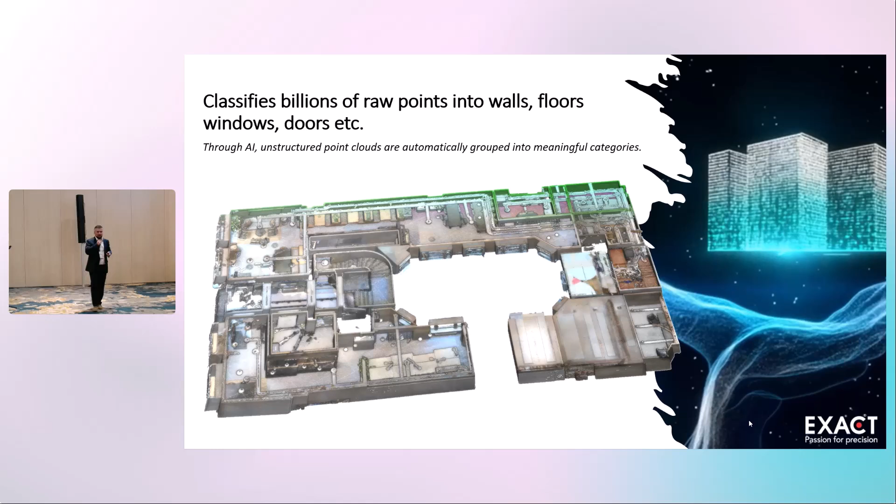So what you're seeing is basically an unstructured point cloud, which we need to structure. We have developed AI that provides and attaches a color to an element. In this case we have green for walls, and different colors for different elements.

Once you have structured that, the next step is what can you do with it? Now we can add IFC elements to it, because we are using IFC to train the algorithm. By adding these elements and giving them more information, you can select what you want to see and unselect what you don't want to see.

Suddenly, from unstructured data you have structured data, and this is something you can already work with. For example, you can take the LOD 100 of the point cloud and select the elements required for that level, very bare in construction, and send it to a modeler who will have a much lighter point cloud.

And normally now, modelers working with point clouds are also using images - with images for more context, and the point cloud they can use solely to focus on modeling what is necessarily specified in the project. So already here we have good use just by introducing these small steps.

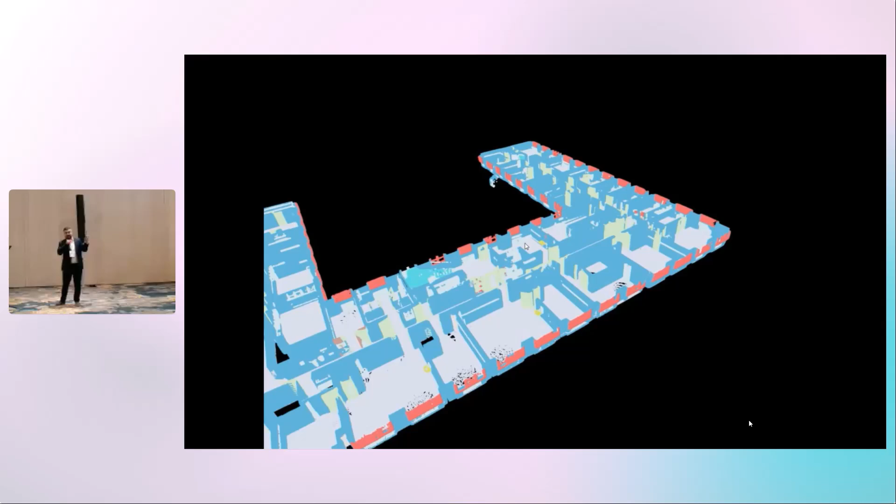Me saying this can be a little bit confusing. I have a movie showing this in action, and this is from a test environment for us. So you have a picture here, and you take this in the proper way.

You press on the picture, it automatically projects, and you can increase, decrease, make sure that you are as close as possible to 100%. You can click further. Everybody that has worked with SAM methods, CLIP, or these methods understands how this technology is basically working. We are just trying to use this technology to increase the accuracy.

By introducing this step, we are very close. We are above 99%, but we are not at 100. The question is: is it possible to go to 100? We are very close.

But the question is, is that the optimal way working with the science project? Well, no. And that now is the punchline for step 3. Step 3 is basically that everything you do in step 2 is teaching the algorithm to be better. So more clicks in step 2, less clicks later.

So we are thinking that after we are done with this project, when we have gone through all the data, 1.4 million, we will remove step 2 and 3, and we will open for only point cloud classification without necessarily introducing the pictures, because E57, with embedded pictures, are much larger files.

When working with this, you need to think not just about all this fancy thing, you need to think about how to scale the servers, how to work with CPU, GPU, and these things. These things are also a completely new subject. I think you could sit for half an hour just discussing these things when working with AI.

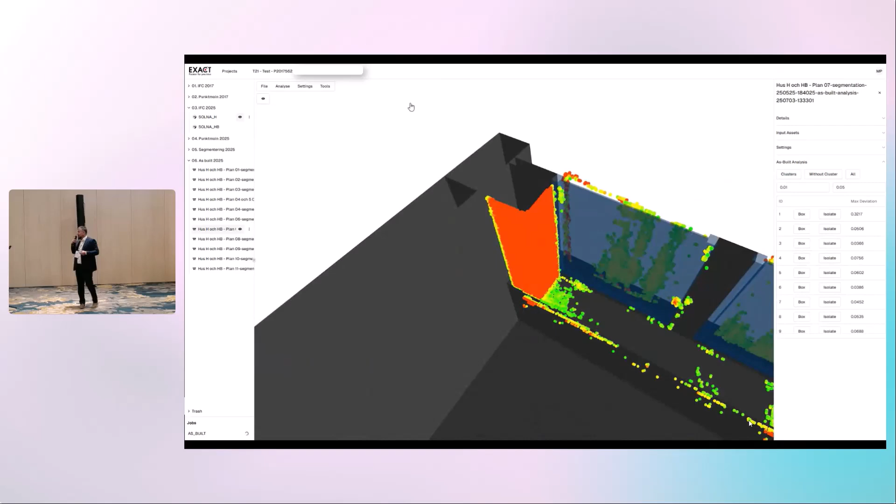So this is something that works. It is in our pipeline. We work with this. Basically, you segment a building of 10,000 square meters within 5 minutes, and you will see that it shows you deviations. So instead of putting down 10 to 15 percent of your time, or 10-15% for quality assurance, you will just have an algorithm running it through in 5 minutes, and then you will manually check everything that it shows. So it increases the possibility for us to be even more effective when producing 3D models from point clouds.

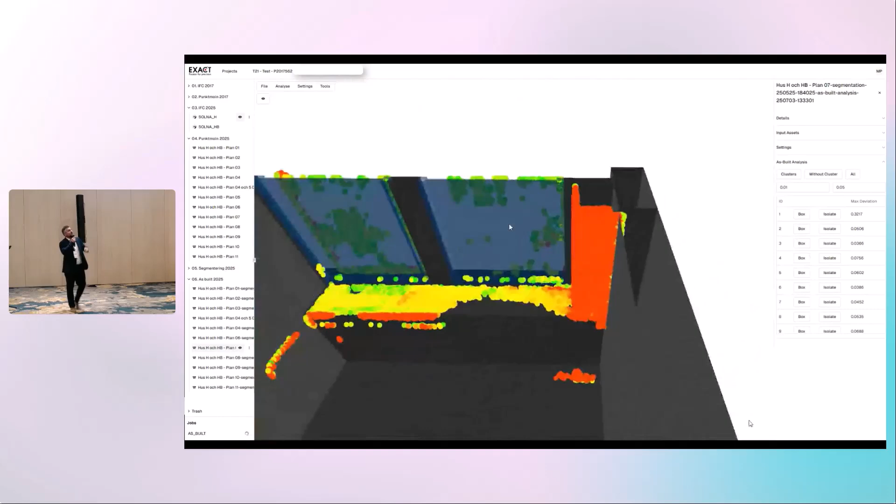Here is a missing door. Same situation on the other side, the corner has been missed completely by the modeler. And the question is, what is this? The algorithm recognized this as some object that should have attention, but the people who modeled it, they modeled it correctly. It's not part of it.

So the question is, when we have implemented BCF here, the question is this BCF basically is creating so many things, so it's a challenge for us to tackle. So we need to go back and see how we can structure BCF data, automatic BCF data, to be able to be more effective.

Well, to move further with classification, we take the second step to 3D modeling. We are classifying into categories. The first step, we have divided this step with 3D modeling into 4 steps. Second step, we automatically generate the floor plans. And then we are adding more information to the floor plans: rules, regulations, Norwegian standard, Swedish standard, and so on, BSDD. And then we are just building up a 3D model based on IFC.

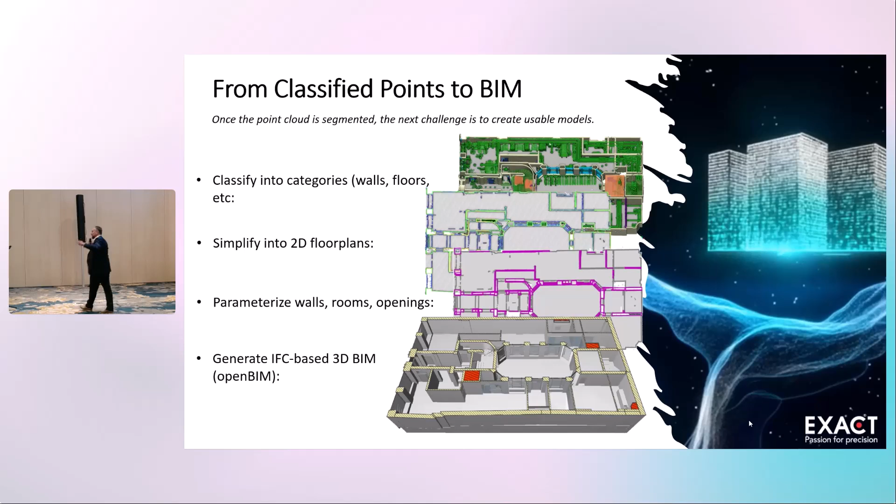Our focus is IFC, but the project directives are native files, and that too is a separate subject. So let's move on, to be able to generate RVT or PLN files another time. But that's a project objective in this case. So where are we? We have looked into deep learning. We are using deep learning all over the place in this project, but in this case, it's not time for it. We have looked into mesh modeling.

It's not time for that either in this project. But what we are doing, our method, these 4 steps, is very transparent. It's architecturally logical, and basically we can add BSDD, we can add IDS, we can add things that are making it more adaptable.

We can add a Norwegian standard, we can add Swedish standard, we can add other standards to it. And currently we are at step 3. We have managed to produce floor plans, and we have managed to add some rules. At the same time, we are working with LLMs and VLMs, natural language and material requirements or material information.

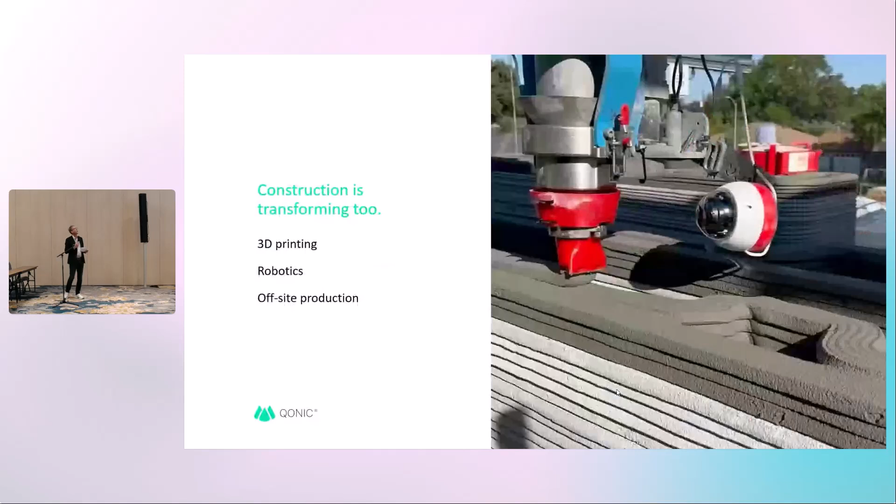And then this is a perfect slide for this part of the presentation—it's not only in the design part, it's also in the construction part. So when the design is finished, of course it has to be built as well. And then you see that also in the construction industry, there is a lot of new technology emerging.

One of the well-known ones is 3D printing, allowing that complex geometry to turn into reality. You have robotics for building, on-site and off-site. Next slide, please.

But there is a but. We think that this nice opportunity is a bit hampered with the modeling tools or the software we have today.

So today, as you start on a design, you have a choice between two paths. You can either work in a free form modeling tool, or you can directly start in a more technical design tool. If you start with a free modeling tool, you have the well-known examples like Rhino or SketchUp.

Okay, so let's show some things here in Qonic. I want to show some of these points that Dieter mentioned during his presentation. First point being about taking geometry from basically anywhere and continuing it within the further process in BIM. In this case, we have some geometry that came in from different sources: some Revit models, some IFC files, maybe some geometry modeled in a tool like Blender with really complex geometry, or maybe some industry-specific geometry, like an elevator modeled entirely in 3D. The point we were trying to make is that we don't want to limit the functionality within Qonic based on where it came from.

So for instance, we have this little pavilion, which was actually made in Rhino. There's some 3D geometry with a nice looking roof here, but it's not actually BIM geometry. It's not data rich. If I select this door here, you'll see it doesn't actually have an IFC classification. This is a building element proxy because, again, it came in via Rhino. It's just dumb geometry. This also means there's no relation between this door and the wall it sits in, so if I move this door, you'll see that the opening doesn't actually move with it.

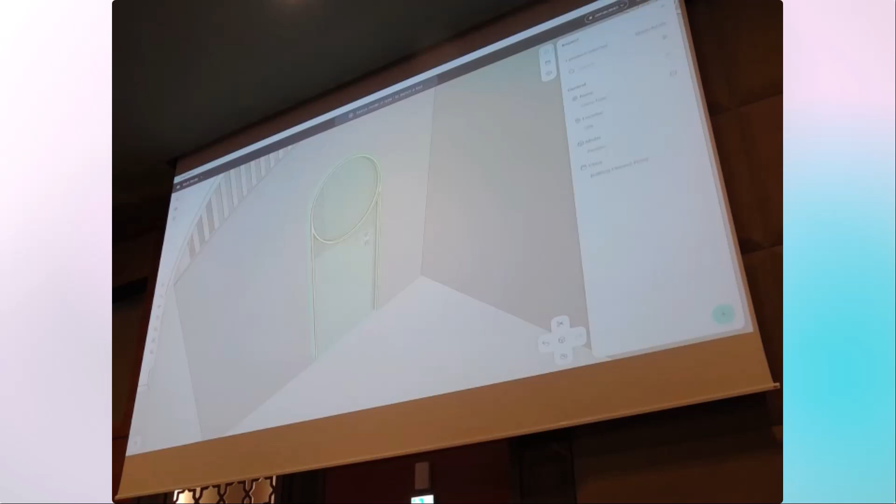Because, again, this is what we call dumb geometry, Qonic allows you to enrich these kinds of models coming from SketchUp or Rhino with proper openBIM data. The entire data structure of Qonic is based on IFC, which means we have things like IFC classes and IFC property sets built into the product natively.

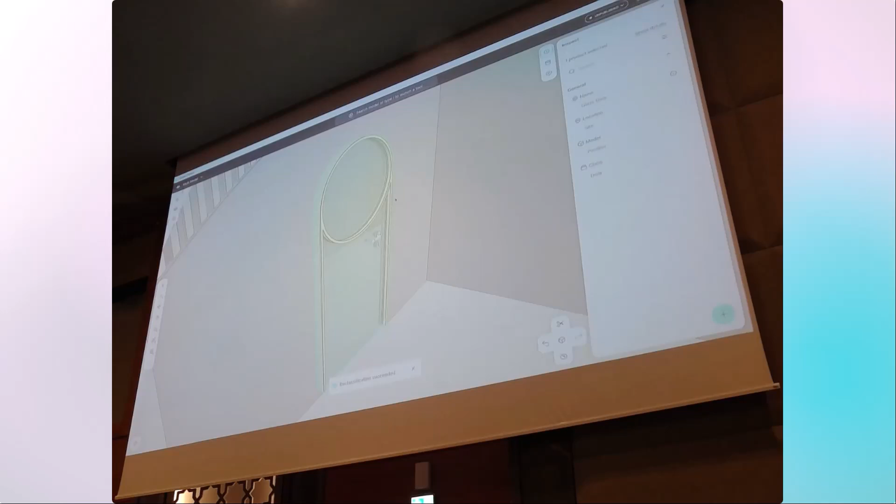So we can either classify this door manually by choosing from a list of supported IFC classes, or we can let ourselves be assisted by our own AI assistant. As Dieter mentioned, there's an AI assistant called Qonic Intelligence, which, based on the geometry and context, will make its best guess as to what something might be. In this case, the top guess is a door, which I will accept. Now, once we've classified this as a door, it'll behave like a door. So if I move it, you'll see it'll actually also update the door opening, behaving more intelligently.

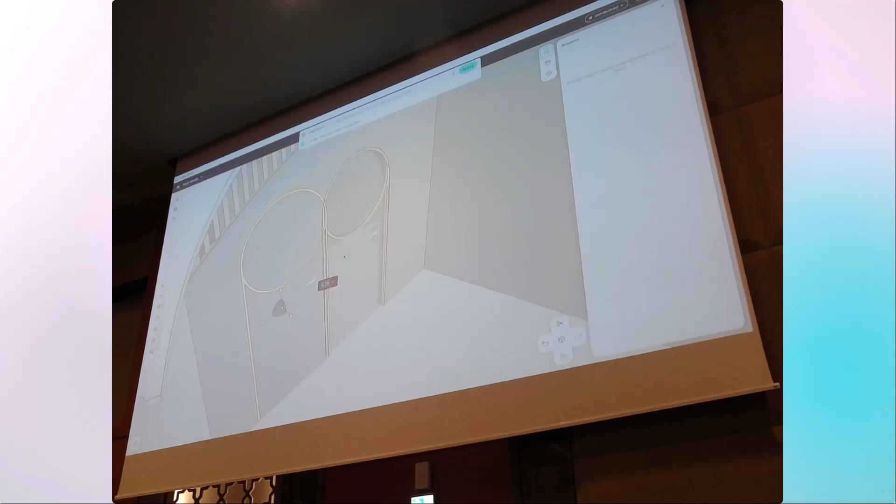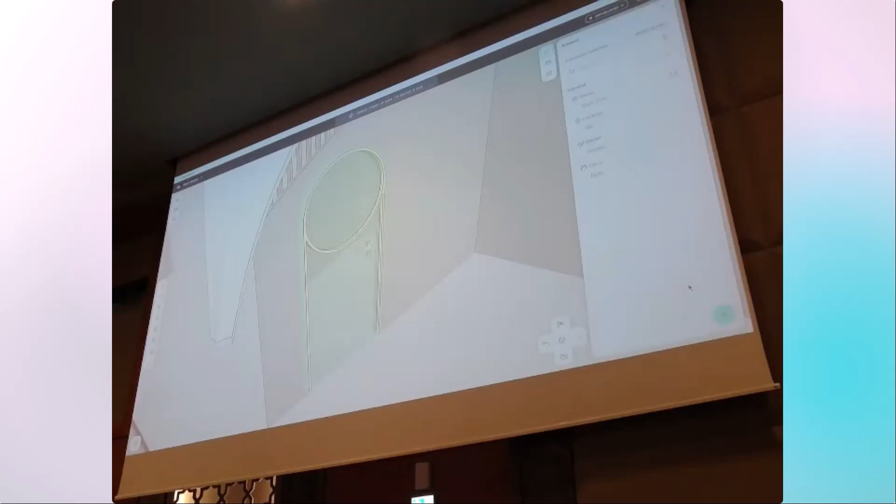We can, of course, further enrich this with other openBIM data, let's say property sets and properties from the IFC schema for a door. So under door common, I can add a fire rating and so on, status. So I can enrich existing models coming from geometry modeling tools and take them further downstream in the BIM process.

So not only can the data be edited, but of course the geometry itself can also be modified. You can take this geometry coming from Rhino or any other tool, also IFC geometry, and actually start to modify it, of course if you have the necessary access rights. So in this case, I'll create an opening in this roof here.

This is actually just a small demonstration to show that we can handle quite complex geometry. This is NURBS geometry coming from Rhino, and it can still be further edited within Qonic.

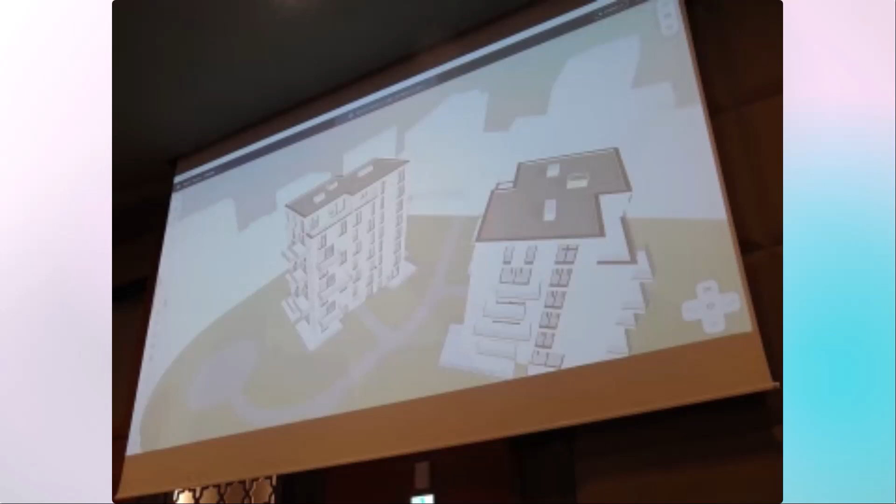Now let me switch to a different project where I'd like to show some other features that Dieter talked about, namely democratizing the BIM process for non-technical users. People who don't have years of training in the IFC schema or in a specific product like Revit or ArchiCAD should still be able to interact with these models. In this case, we have a model that came in as an IFC file, and we can simply ask questions in natural language about it.

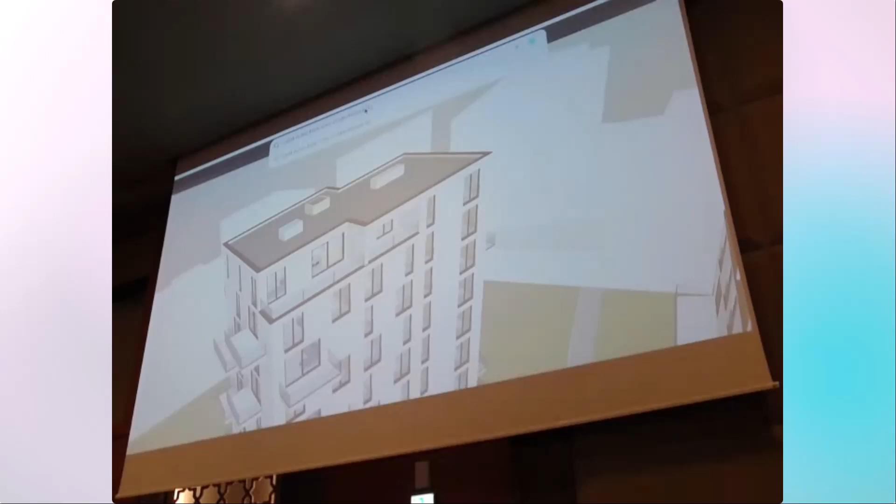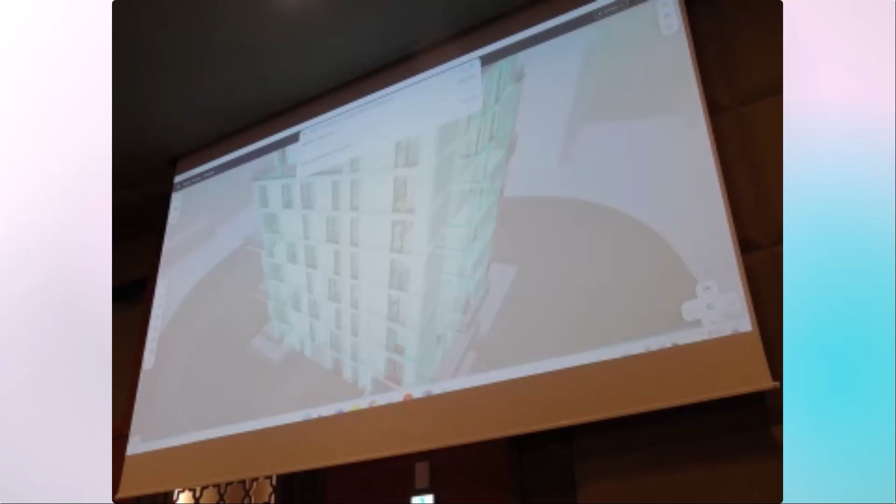For instance, what is the total area of plasterboard in building 1? The assistant will parse this question, apply the correct filters, and make the calculations. In this case, we have around 5,900 square meters of plasterboard in building 1, based on the selection it made from this geometry.

Or maybe we want to ask how many doors have a 1 hour fire rating. Again, it will search the IFC schema or the properties assigned to the objects and give the correct selection set. In this case, 307 doors with fire rating. Let's look for the fire rating property: F60, so that's 1 hour. It correctly interpreted F60 as a 1 hour fire rating, matching my query.

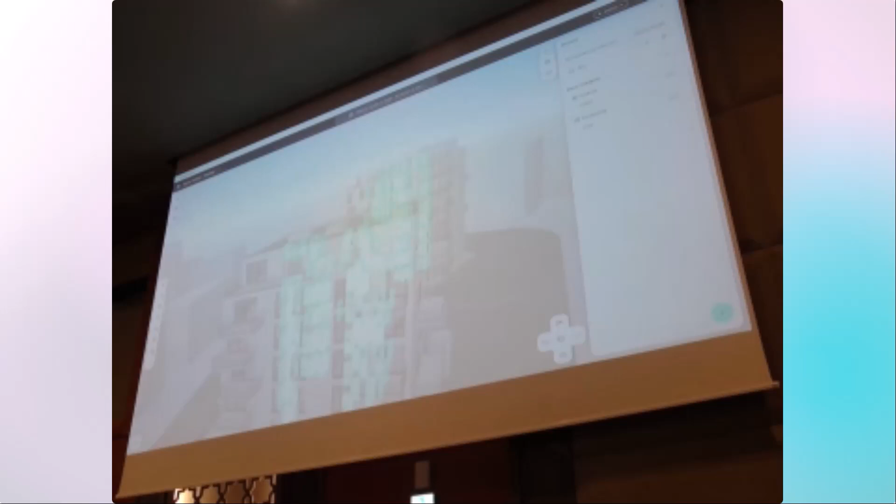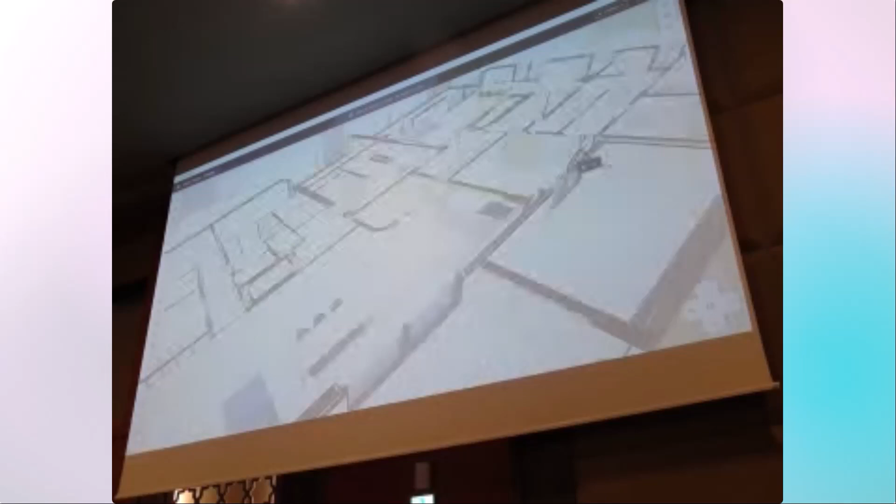Let's take a look inside here. Conic can also be used to do certain checks of an IFC file, like geometric checks. Maybe I want to know if the width of my corridor is according to standard. You can do some very local distance checks - in this case it's about 1 meter wide, which would be maybe okay.

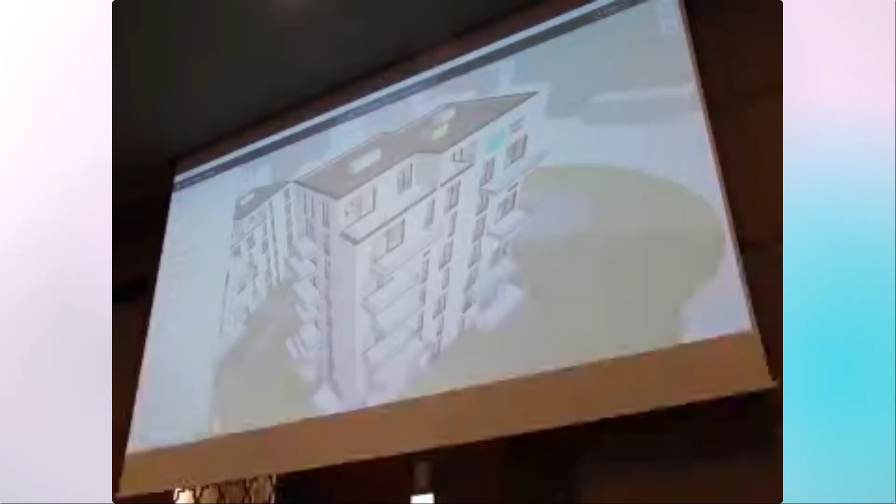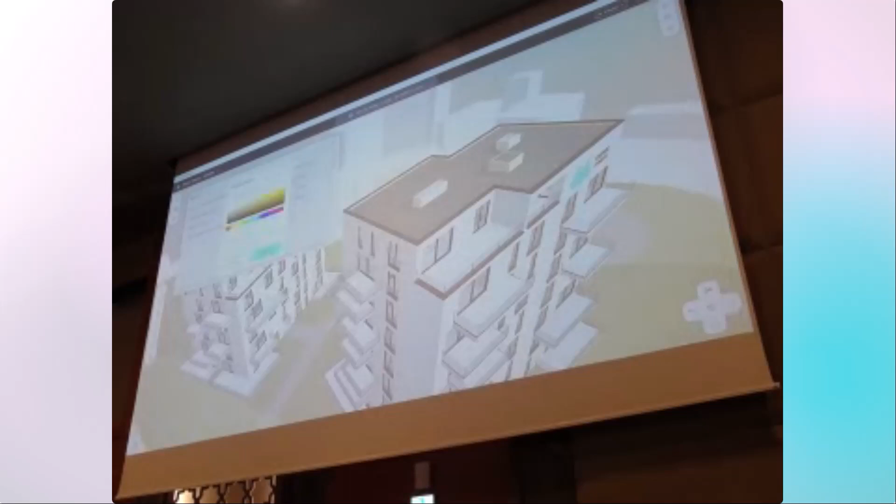Or you can do visual checks on actual properties and data in the model. For instance, if I look at the fire ratings of the doors, I want to see visually where the doors with specific fire ratings are. I can create a sort of report showing the different fire ratings and colorizing them - 1 hour fire rating doors, 90 minutes, and apparently there's also a couple of doors without a fire rating assigned. Let me color them in blue here.

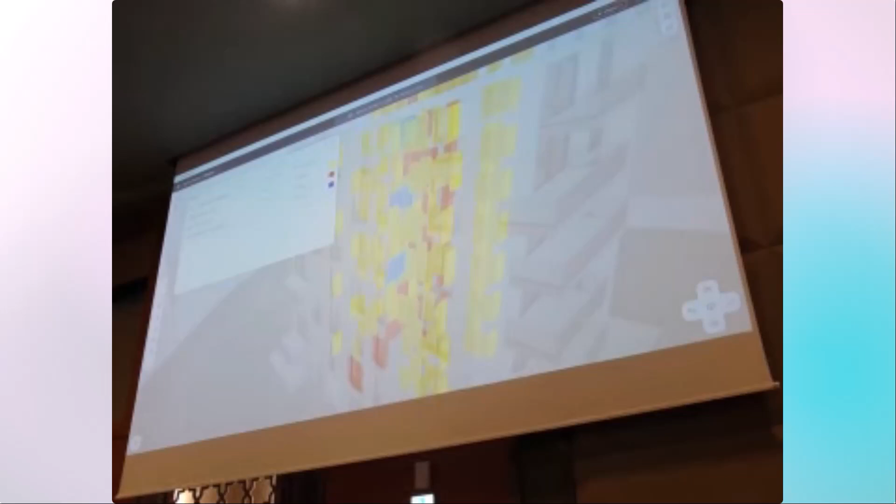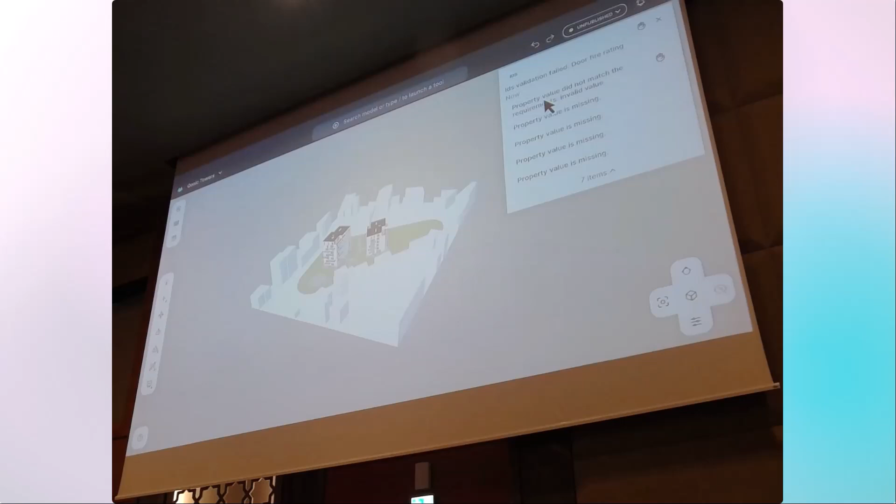So there's a couple of doors that don't have this property assigned, which we can actually resolve within Conic. We cannot just evaluate these models, but we can actually enrich them and fix them to get them to the necessary level of data. This was a visual check of property values. It'll also be possible to do this in a more structured way using IDS checks. This is currently still in development, but it allows you to read in any IDS files and get visual feedback on what is missing, then either create issues from that missing or incorrect information, or build that information natively into the model at that moment.

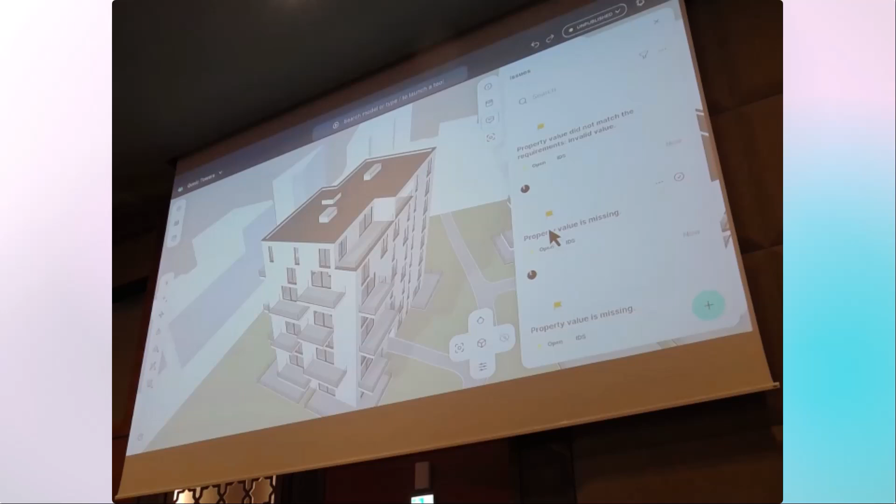As Dieter mentioned, one of the questions we want to assess is whether something is buildable. So we're building in some tools for 4D simulation and planning - I'll give a quick demonstration. Here we have an IFC file with data like IFC classes, but there's no information about planning, no tasks assigned to these objects. We're working on what we call visual planning, allowing you to easily and quickly create and assign tasks to objects and visually check whether they're actually buildable in the proposed order.

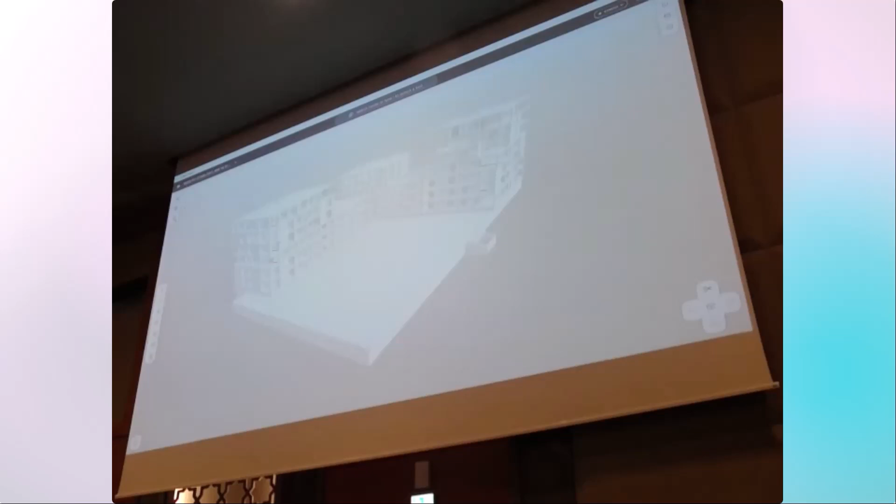Starting from a preset based on groups and filters assigned from the IFC data in the model, we can create a first pass at a planning. In this case, I have beams, columns, walls, and slabs on different floors in different parts of the building, and I want to say: first build the slab, then on top of that the column, walls, and then the beams.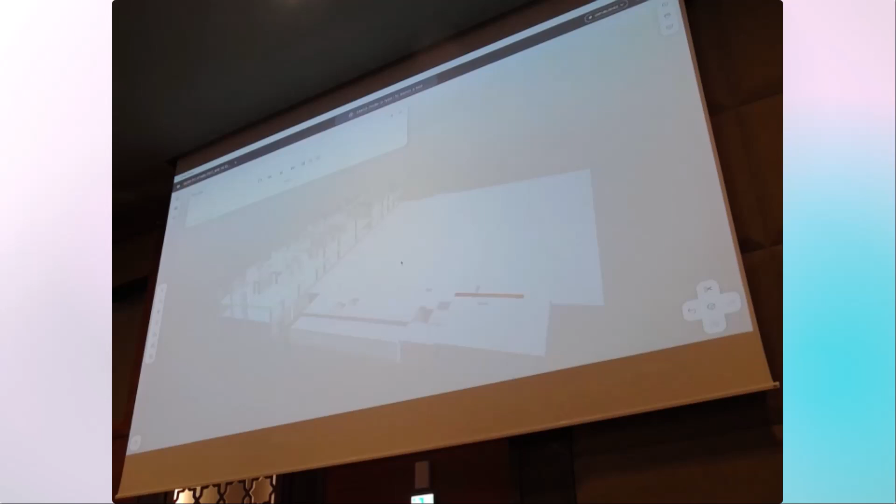Once I did that, it will actually create the tasks for each type of object on each floor and allow us to quickly see, simulate how this building would actually be built. This is just in a few seconds, based on just common sense and IFC data in the model.

I can actually see that there may be something wrong here. There's a couple of columns that are floating. Looks like some of these columns were actually in the wrong place during the planning. So I can make sure they're part of the correct work set, part of the correct building. I can adjust data to make sure the planning actually makes sense and the building is buildable. So based on that, I can create a new planning, I think.

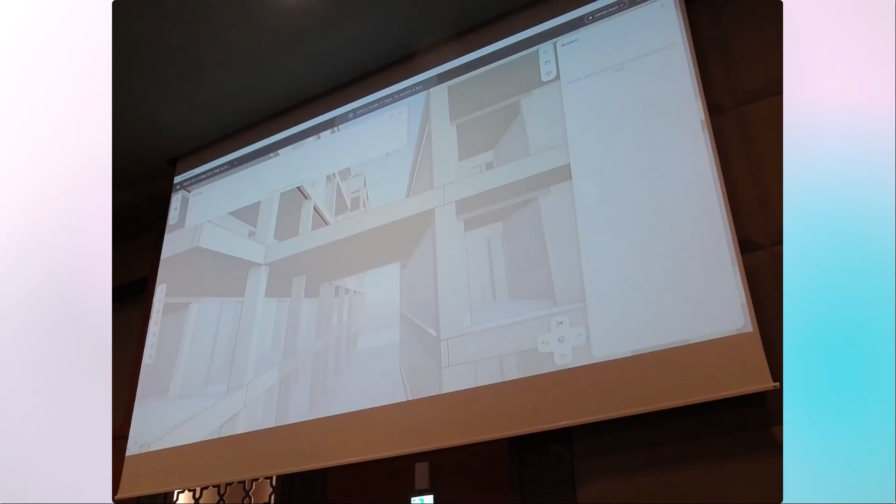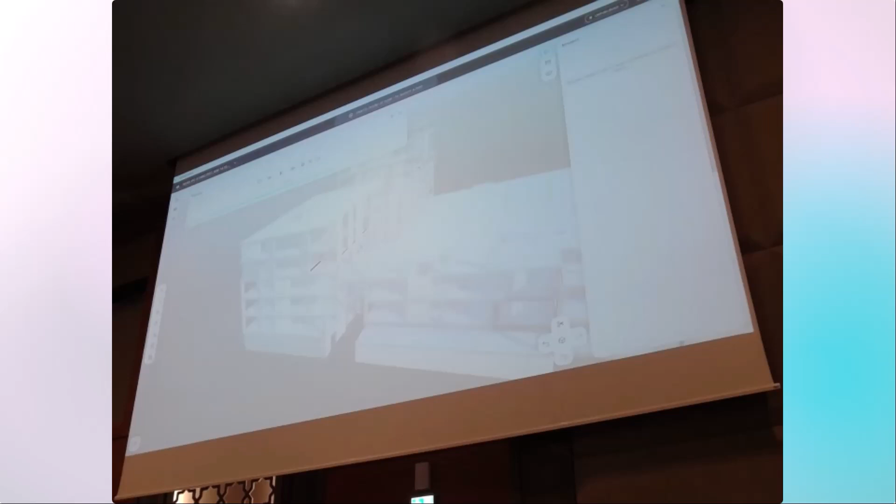So it allows you to quickly iterate and check whether things are buildable. Let's take a look. This already makes more sense. So it looks like we found an error in the IFC data and rectified it by looking at this visual planning tool. This is also still work in progress, so not yet released, but we thought it made sense to show this here in the context of this presentation.

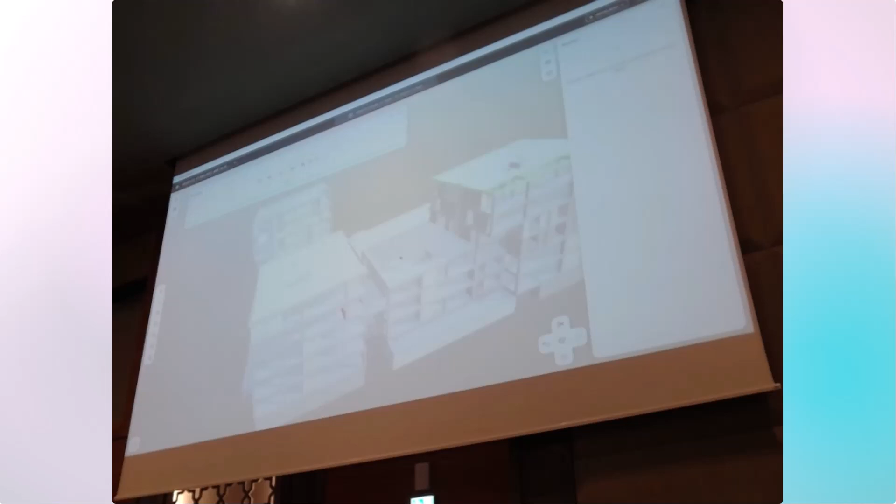And finally, based on IFC, we're also working on creating construction documentation, or actual 2D deliverables, from these IFC files. So basically the idea is: take an IFC file, where necessary enrich it with data or geometry, and then get deliverables out of them as well. So for instance, here we have an apartment building, which again was an IFC file with some floors and elevations defined inside it. So a couple of stories here.

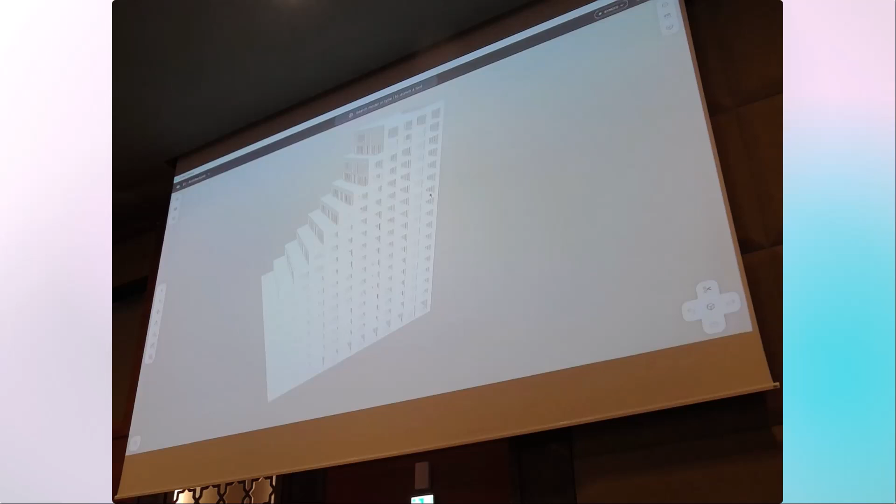And based on this story information, Conic can automatically generate floor plans of this geometry. So for each floor, a floor plan will be generated, which can be viewed in your browser, but also edited, annotated. It will be automatically annotated with dimension chains, things like door tags, window tags, which can then also be manually edited where necessary.

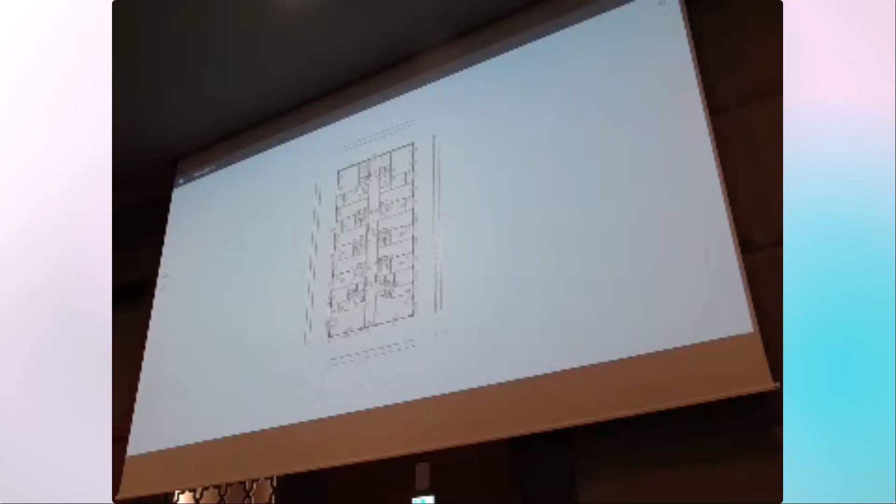With automatic running dimensions and things like door and window tags, this was all generated automatically, but again you still have the control to manually, for example, move some annotations if they're in the incorrect place and so on. This is fully vectorized, so we can always create a DWG out of this, which can then be taken further downstream in the process.

I think that was the end of my demo. I don't know, Dieter, if you wanted to say a few things still.

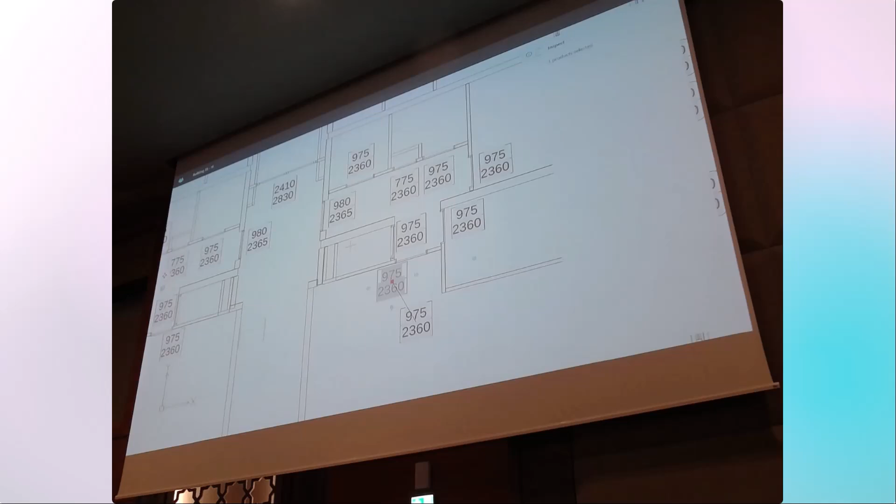Yeah, maybe just to end, the thing we wanted to show is that we're rethinking model validation, working on a way to make it more supportive for designers to create and validate your design. And we showed some examples where, with automation, with AI, with some good tools, the designers and contractors are supported to get their design up, finish it, and get deliverables ready in as short a time as possible. So I hope that can be inspiring for some of you and enlighten your work.

And we still have maybe some time for a question or two.

Thank you for the presentation. Very interesting demo.

So I'm curious about the versioning of imported IFC files. You showed that you can change some of the parameters of the IFC elements. If you get a new version and the same element comes in, do you have to change that parameter again?

No. I didn't show this in the demonstration because we're limited on time, but basically there's a built-in version history for changes that happen within Conic. Every change is tracked, can be reverted, can be viewed, can be compared, but that also works for external changes. If you have a revised IFC file with some new or modified geometry and data, the modifications you made within Conic can be merged together with the ones in the revised IFC file.